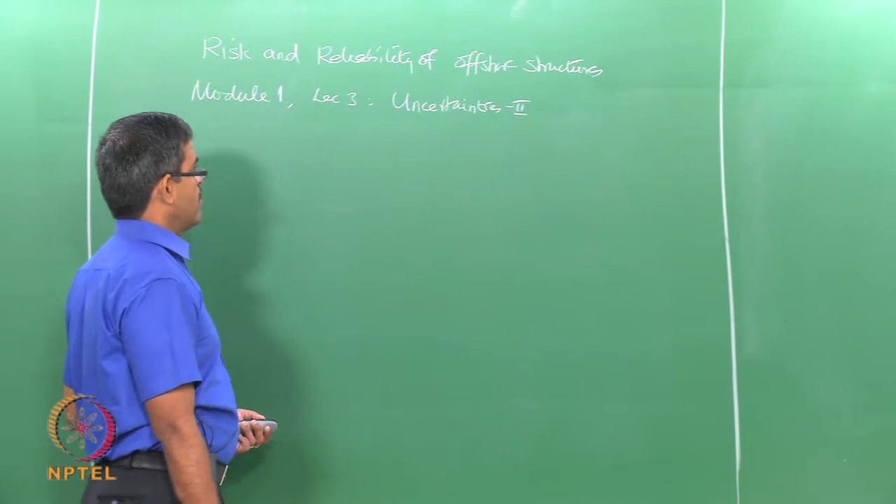Friends, we are now discussing an online course on risk and reliability of offshore structures. We are focusing on lectures related to module 1. Today, I will discuss the third lecture on module 1, titled Uncertainties Part 2.

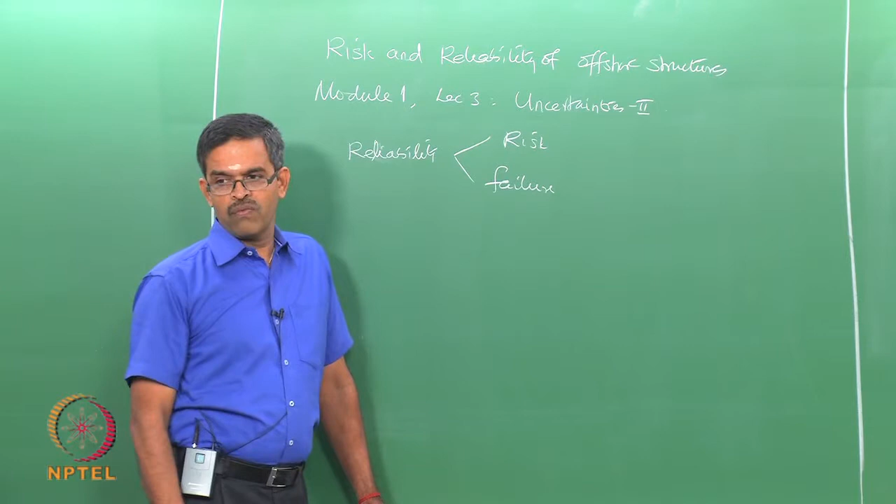In the last lecture, we briefly discussed and compared reliability with risk and failure. We said failure is a negative approach of non-performance of an intended function of any system, whereas reliability is a positive dimension of the same approach, where it says the success of performing the intended function.

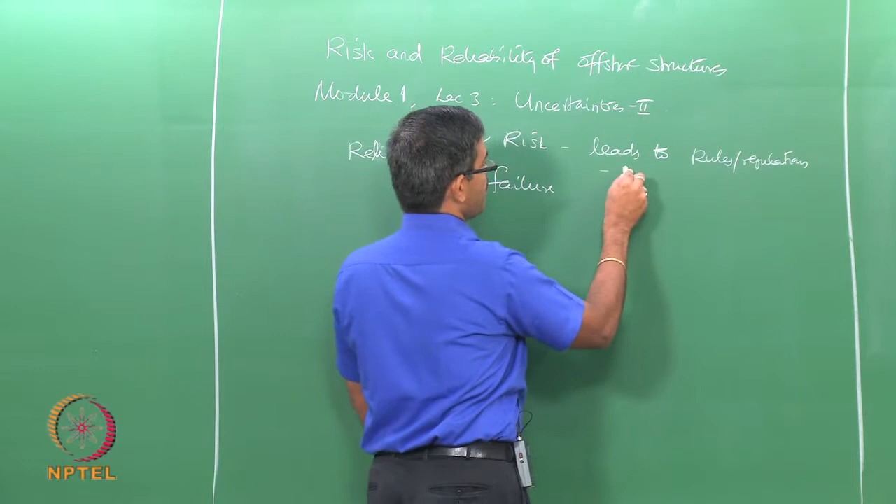Risk, compared to reliability, addresses or diagnoses the failure of an existing event and leads to confined rules and regulations, so that such incidents or accidents may not reoccur. So, they lead to preparation of or prescription of rules.

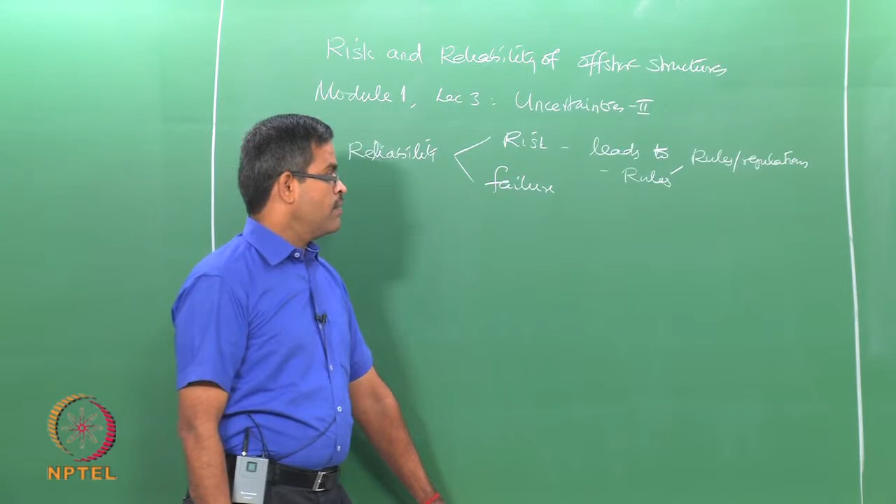It diagnoses the problem in detail, there is no doubt about it, but when you compare risk with that of reliability, reliability actually opens a detailed engineering questionnaire which shall lead to a better understanding of the failure. In fact, we can also say a better understanding of probability of failure.

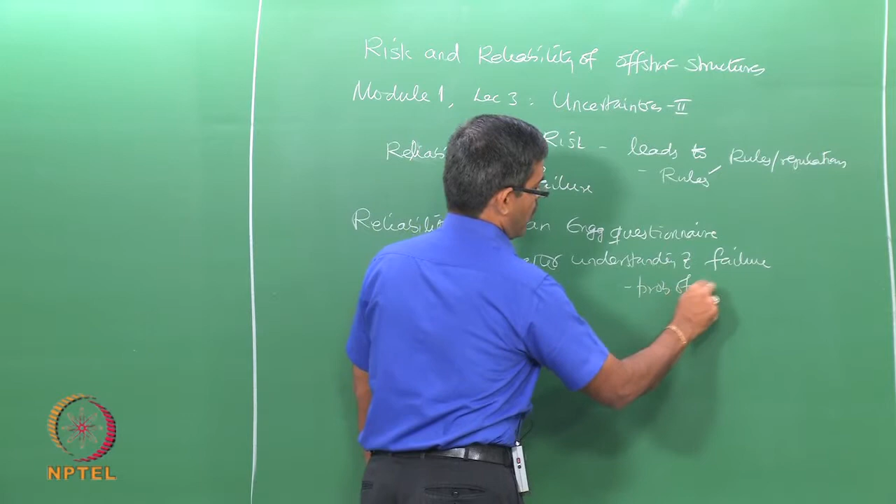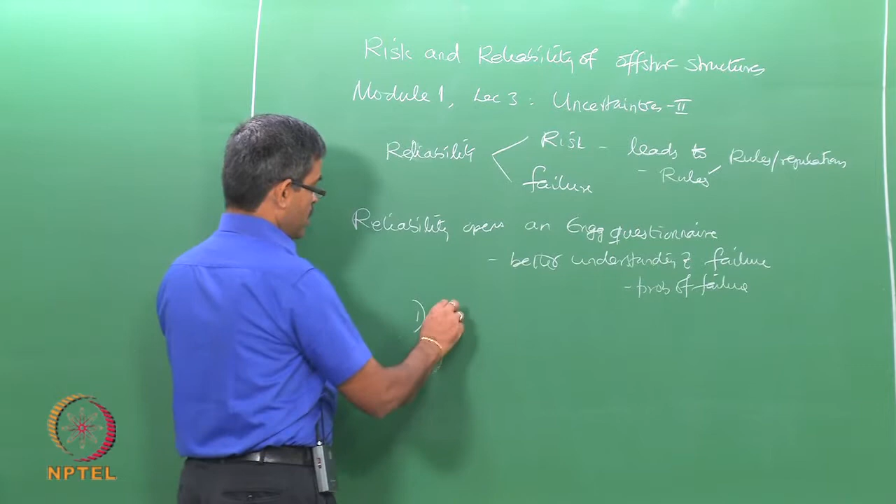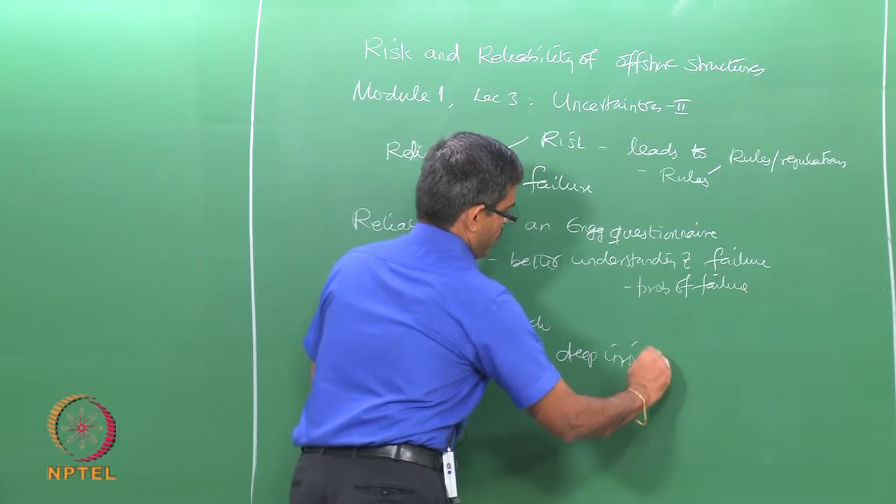So, this is a very salient advantage of reliability compared to risk. One can say reliability gives a positive approach to the problem. It is a diagnosis tool which gives a deep insight. Therefore, it is one of the basic tools.

Whereas risk is a prescriptive tool which leads to preparation of rules and regulations which can avoid such immediate accidents in the near future.

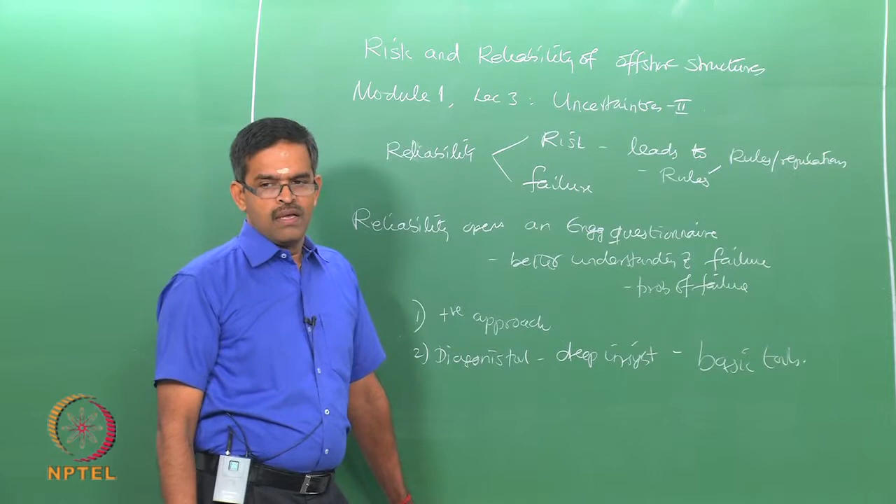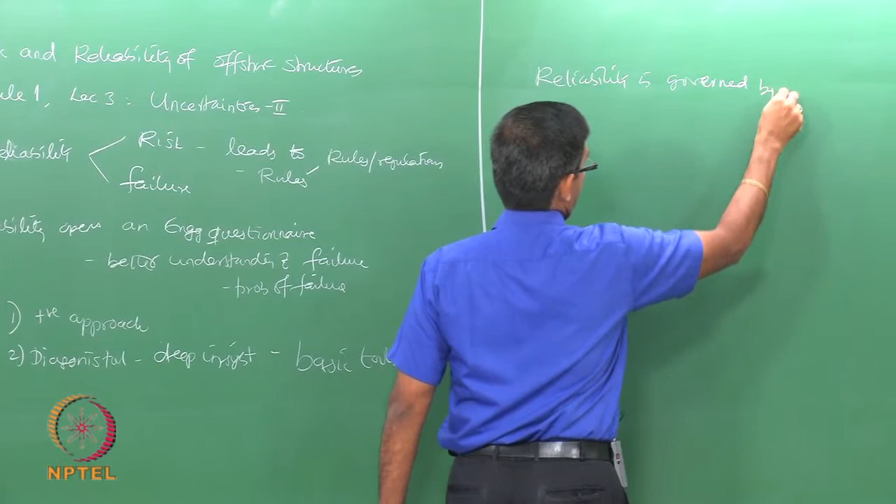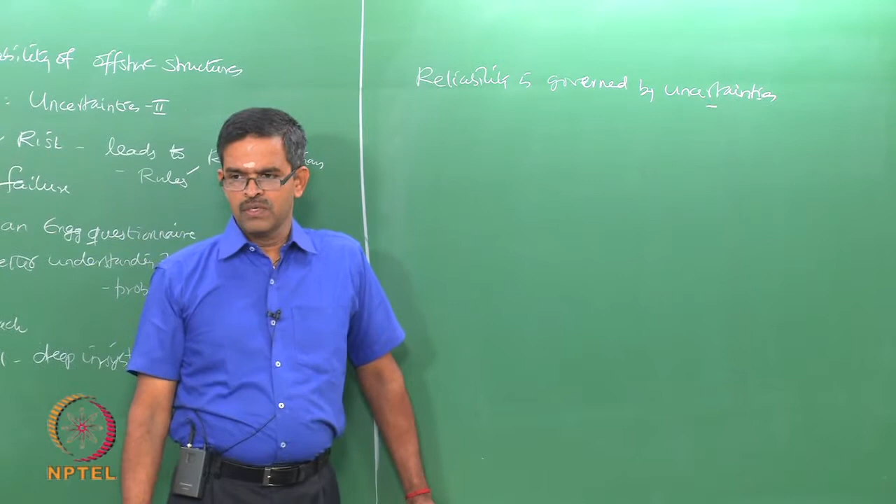We also said in the last lecture, reliability is circumscribed or governed by uncertainties. Uncertainties govern the reliability tools to judge the safe performance of offshore structures. In the last lecture, we also discussed about the types of uncertainties.

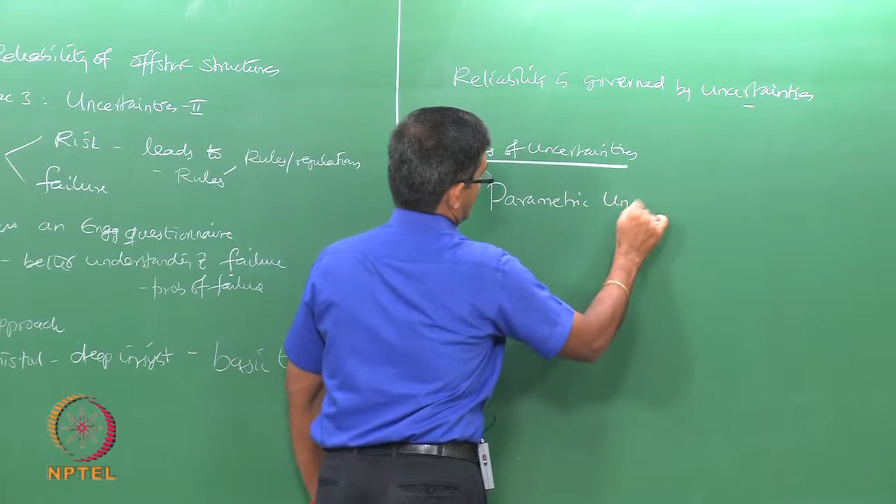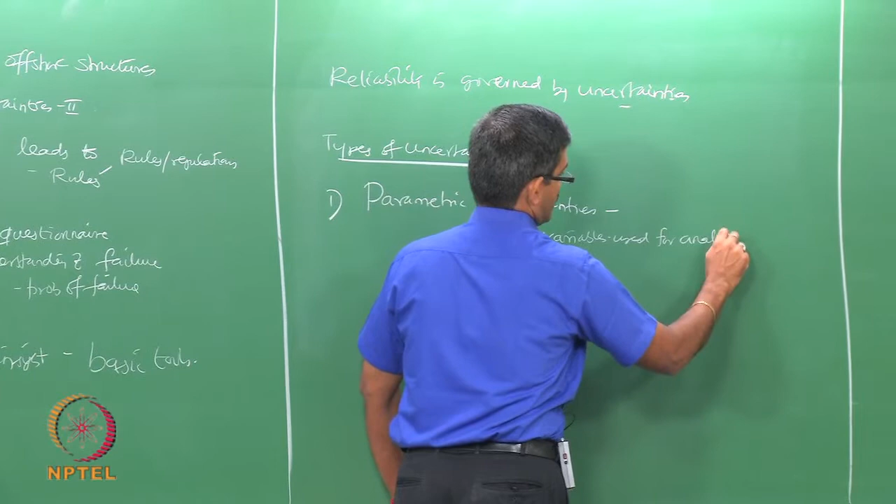If you can recall, we said the parametric uncertainties has a source which arises from the input variables used for analysis and design. So, that remains as a source of this type of uncertainty.

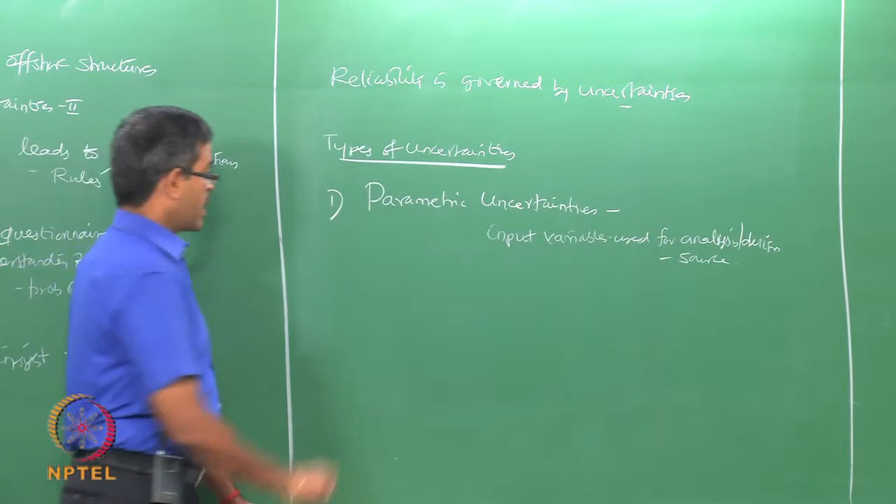The second type of uncertainty we saw in the last lecture is the structural uncertainty. This has essentially the source from the mathematical modeling. So, that remains the source of this kind of uncertainty.

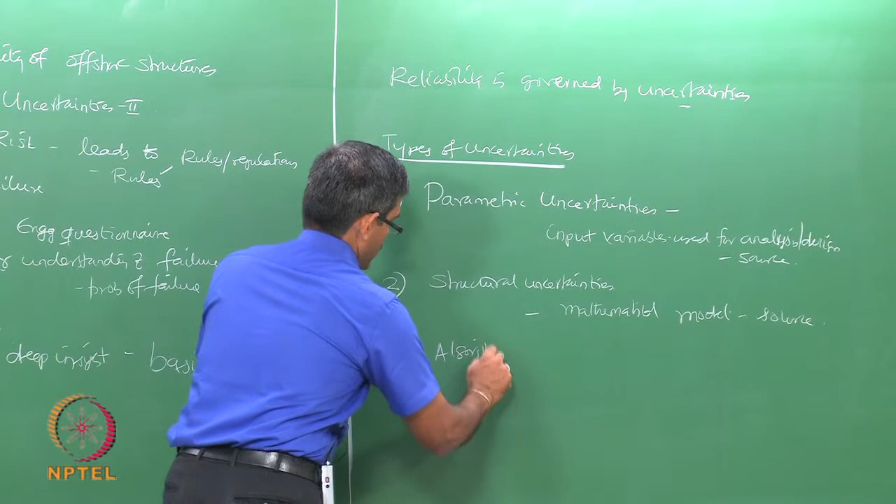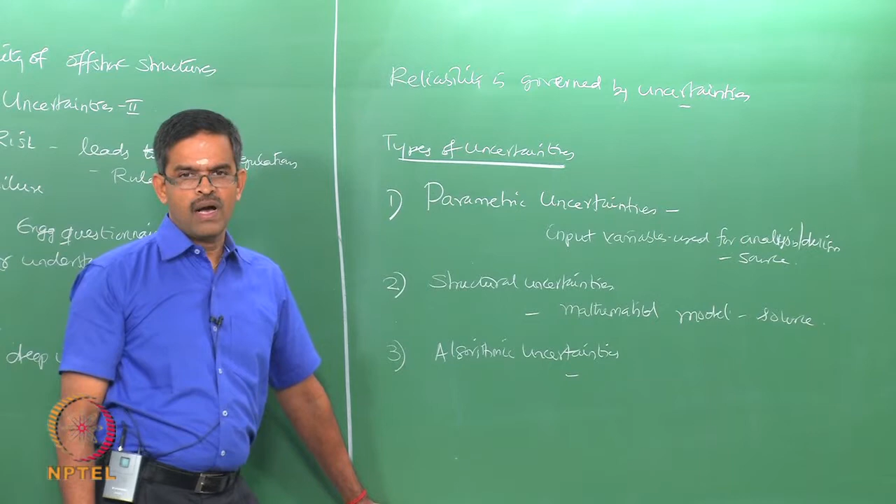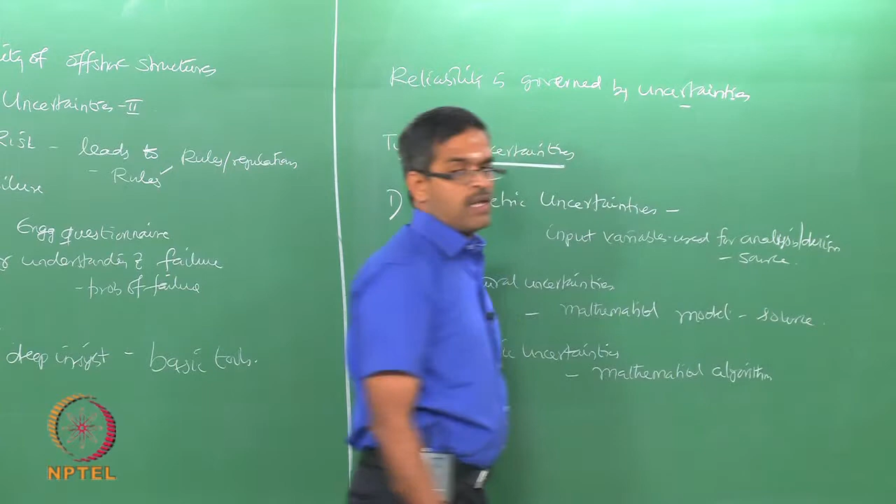The third type of uncertainty we saw in the last lecture is algorithmic uncertainties. The essential source of this kind of uncertainty arises from the mathematical algorithms that are used in the analysis and design. So, that remains the source for this type of uncertainty.

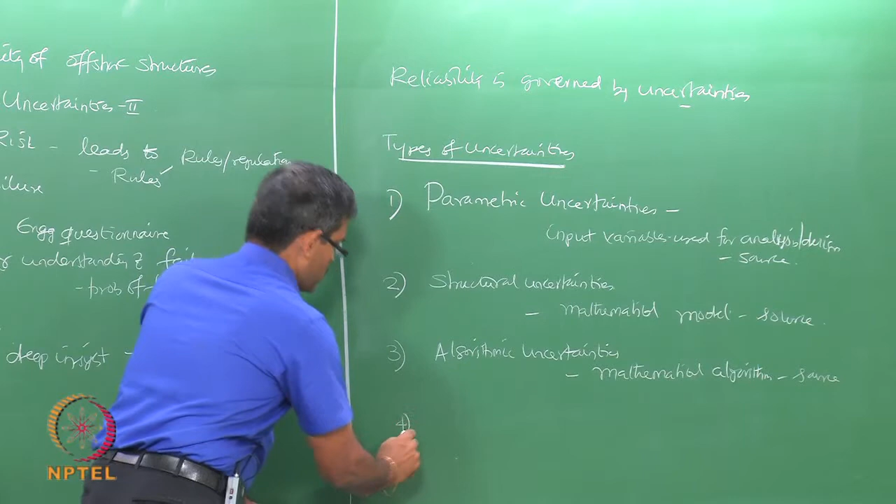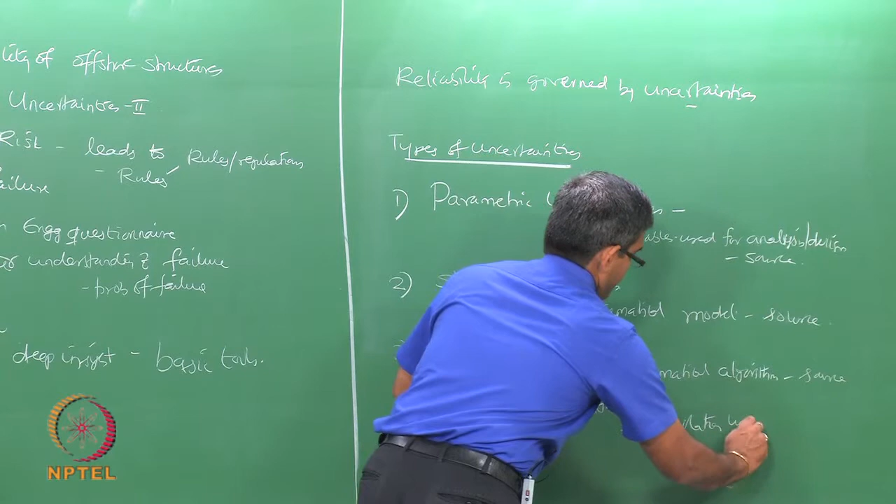The fourth and last type of uncertainty is experimental uncertainties. It is of course a subclass of what we call interpolation uncertainties, which we will discuss now in detail.

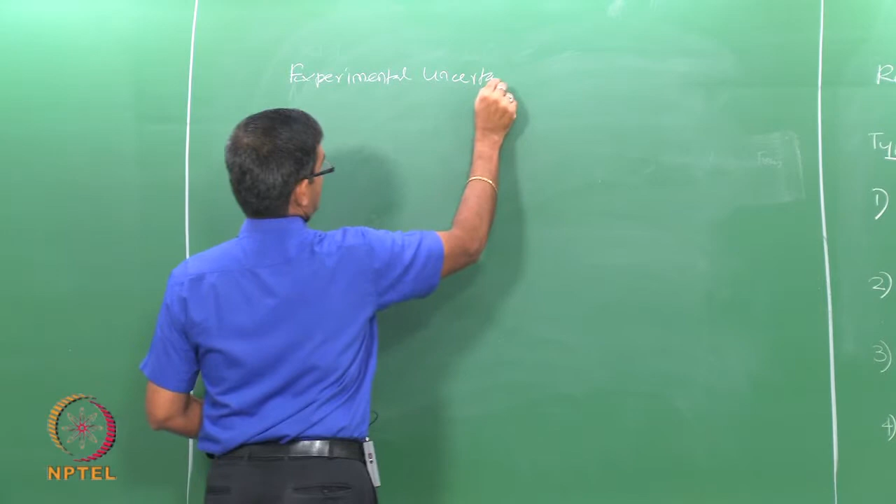If we talk about experimental uncertainties, essentially they arise from the variability of experimental measurements.

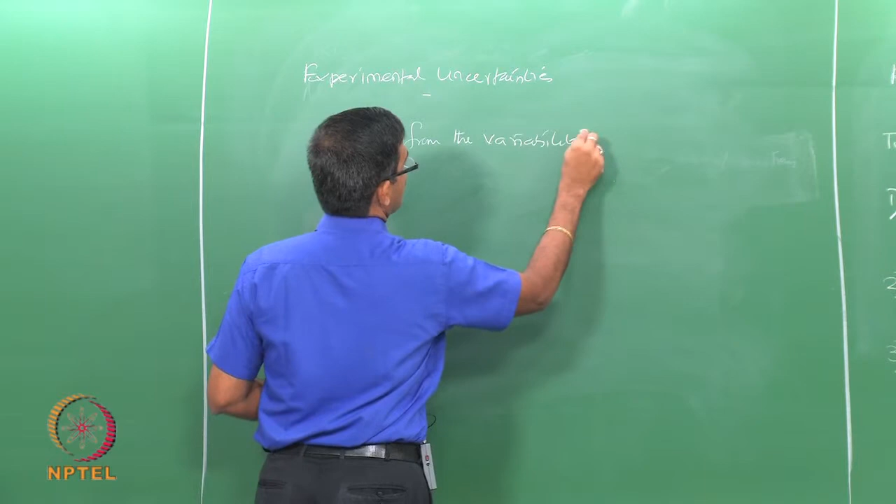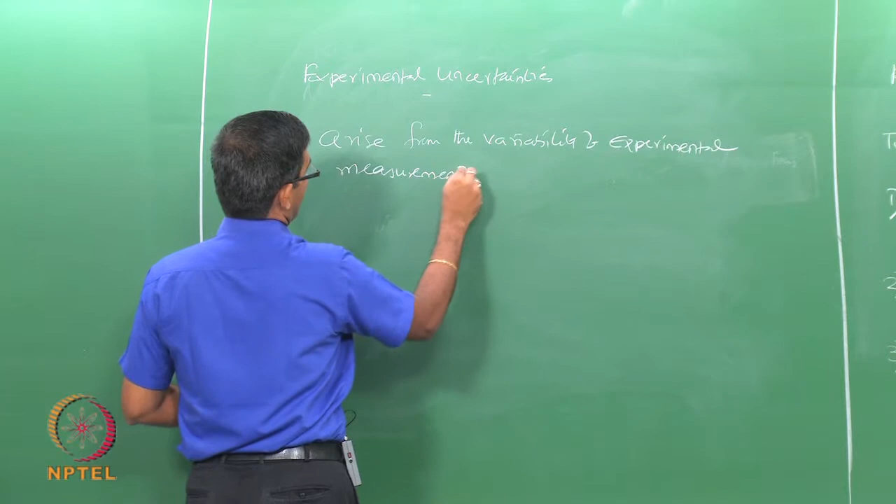We all know offshore structures need to be analyzed for different innovative forms. We discussed that in the earlier lectures. Offshore structures are unique in the design pattern. They are form-dominated, evolved designs. Therefore, any new innovative structural form always demands an experimental investigation. Therefore, experimental studies are inevitable and become a very important part of the analysis of offshore structures.

They are generally circumscribed by serious limitations that arise from the electronic sensors used for measurements during experimental investigations. So, experimental uncertainties are inevitable. You cannot avoid them, you can only control them. They will however be present inherently in any experimental investigation, but the good news is they can be minimized.

Now, how to minimize this? Repeat the experiments with the same set of sensors and input parameters.

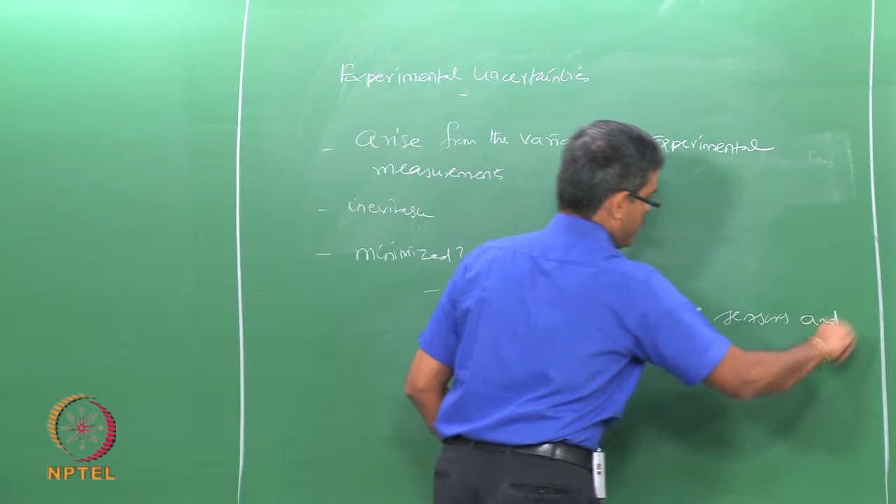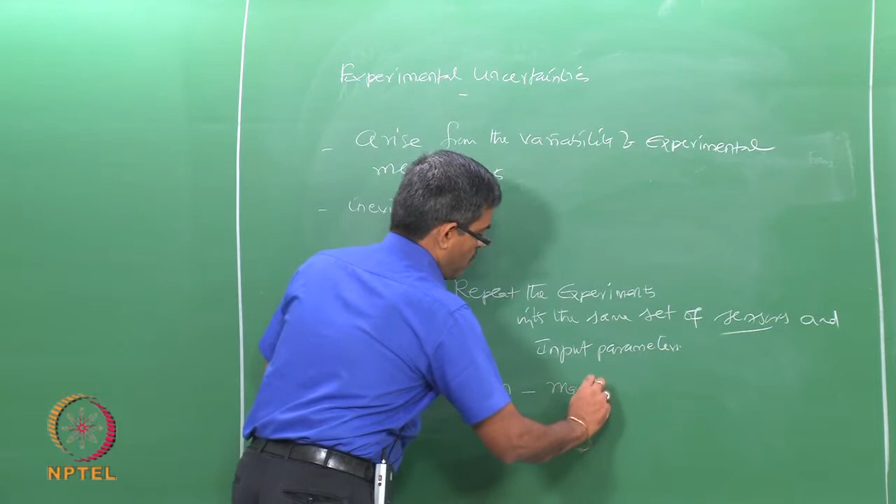The moment you have varieties of results evolving from the repetition of experiments from the same type or set of sensors, you try to take a mean of the results, and this mean can be used in the mathematical models. If you adopt this procedure, then uncertainties which arise from experimental investigations can be minimized.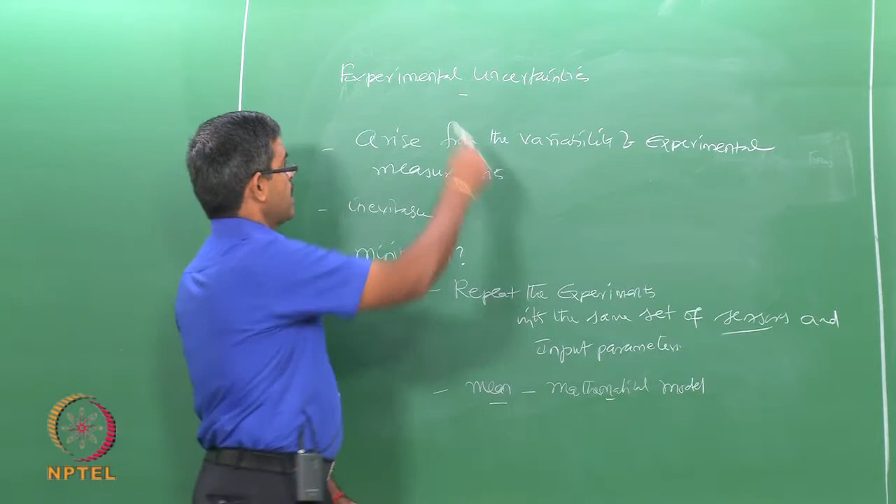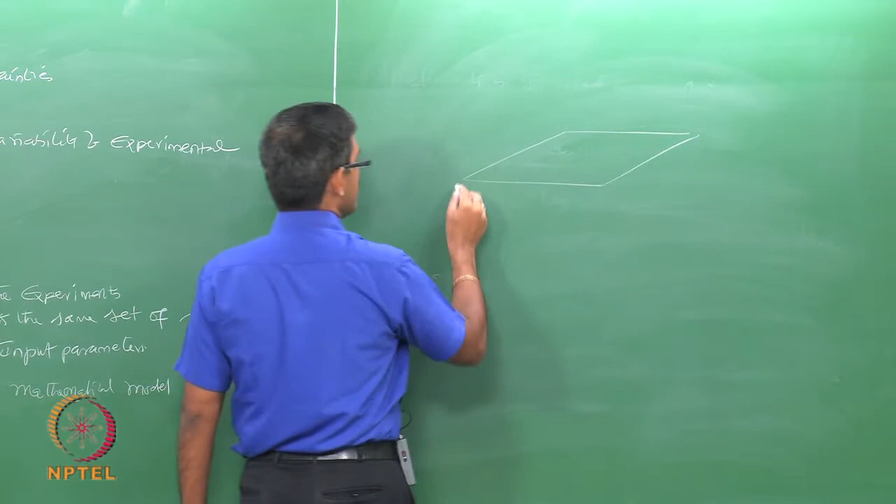Interestingly, in a given system, you try to measure, let us say, acceleration of a deck of a given platform. Let us say I have a platform model with some thickness and some lateral dimensions. The platform deck is obviously supported by the column members.

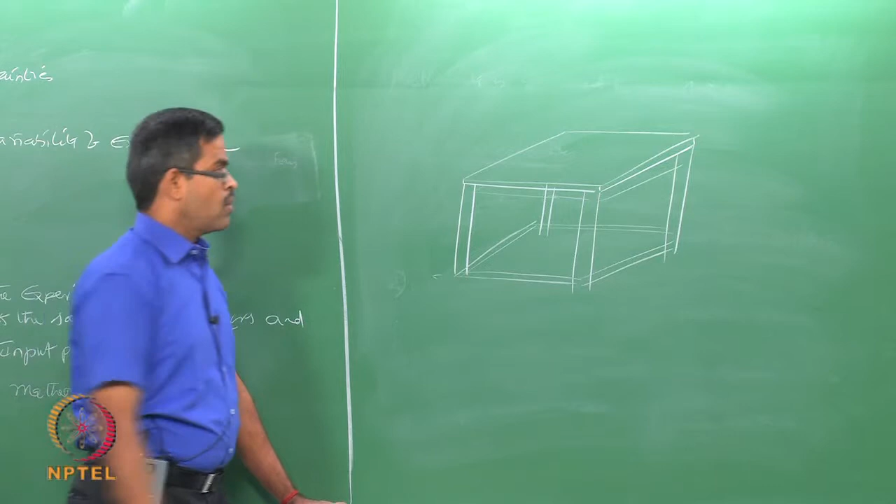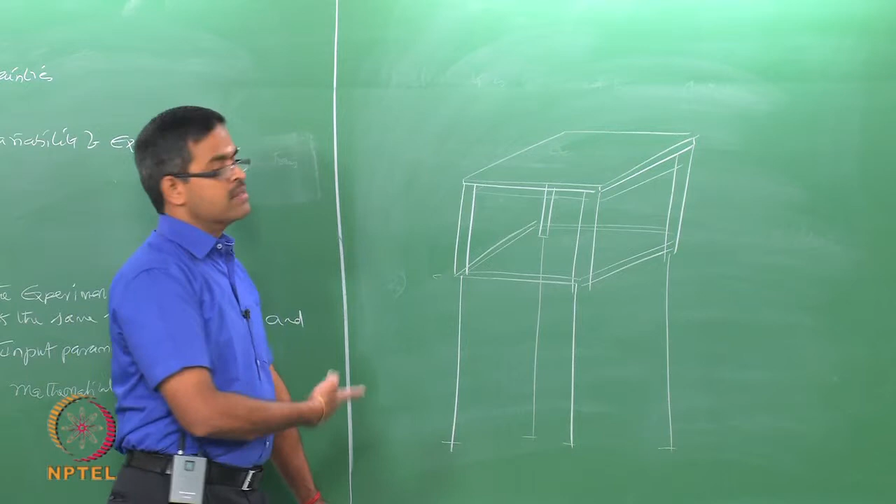And of course, there can also be a pontoon member at the bottom which integrally connects the column members at the deck level as well as at the bottom level. The whole system can now remain afloat by anchoring these legs to the seabed. So, this can be a typical model or a scaled model of a compliant system like a tension leg platform. I can always measure the deck acceleration at the mass center.

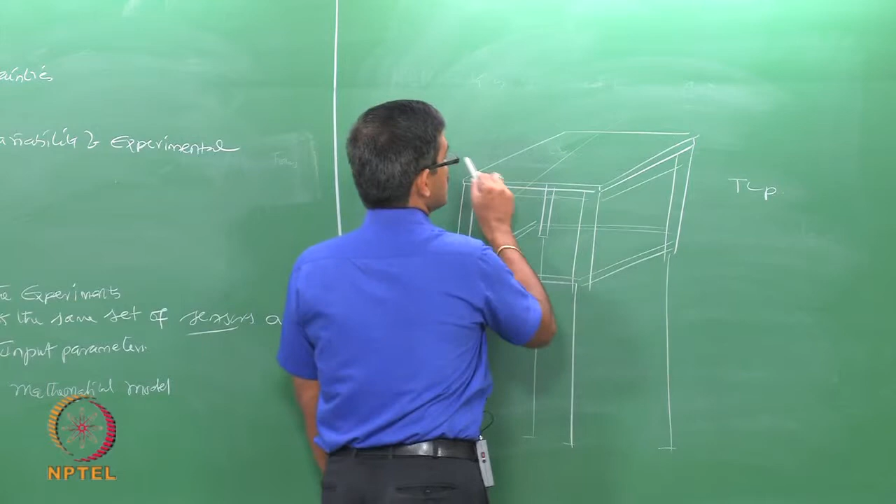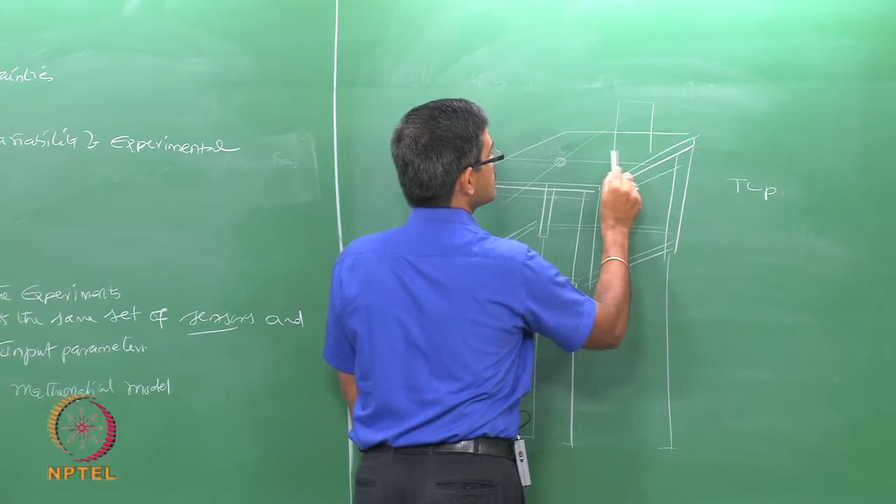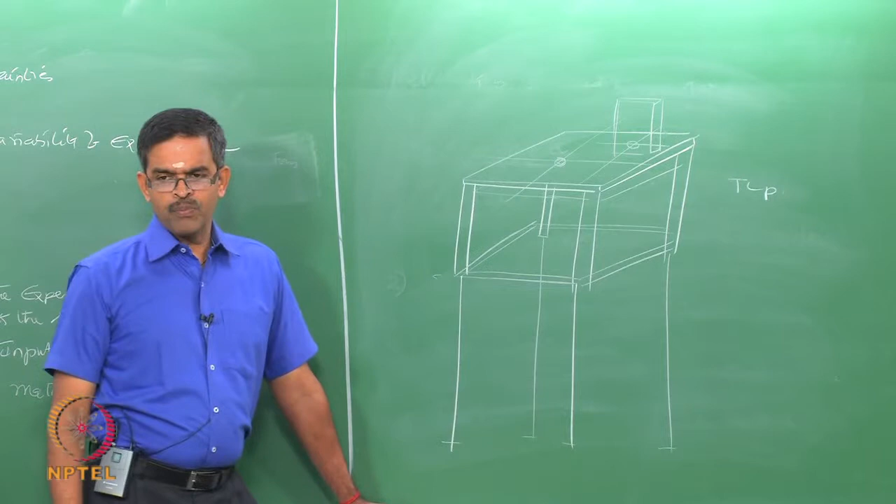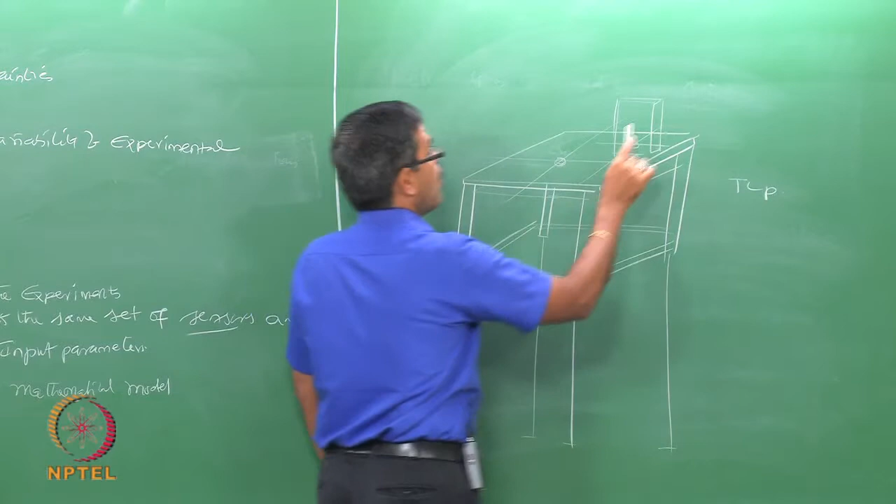If we really wanted to find out the acceleration because of an additional mass kept on the deck at its CG, then I may have to put one more additional sensor to identify the influence of the presence of this mass on the whole dynamic response behavior of the platform under wave loads or wind loads.

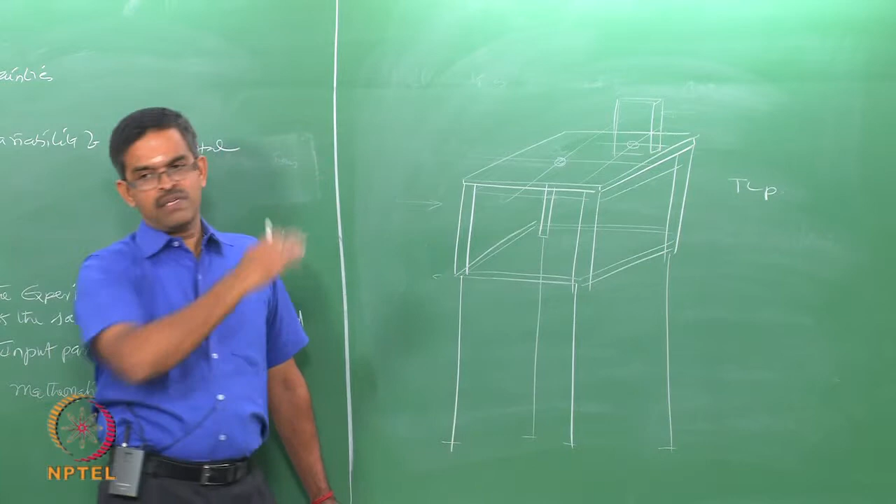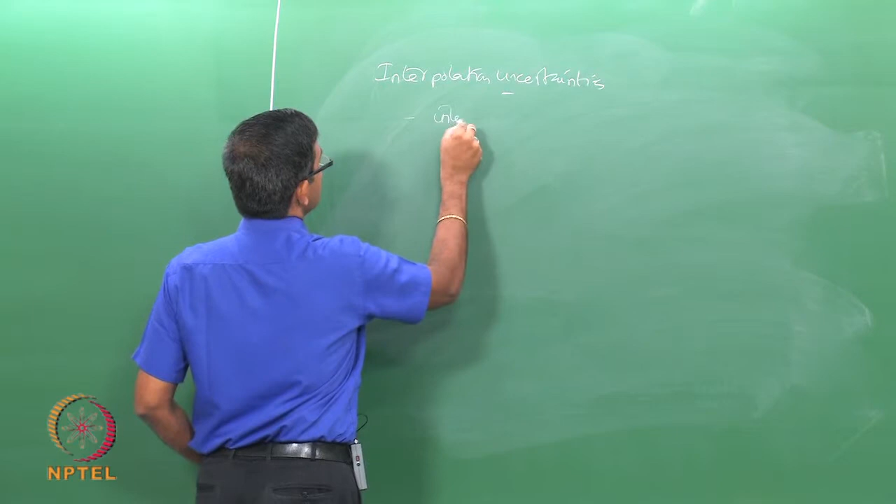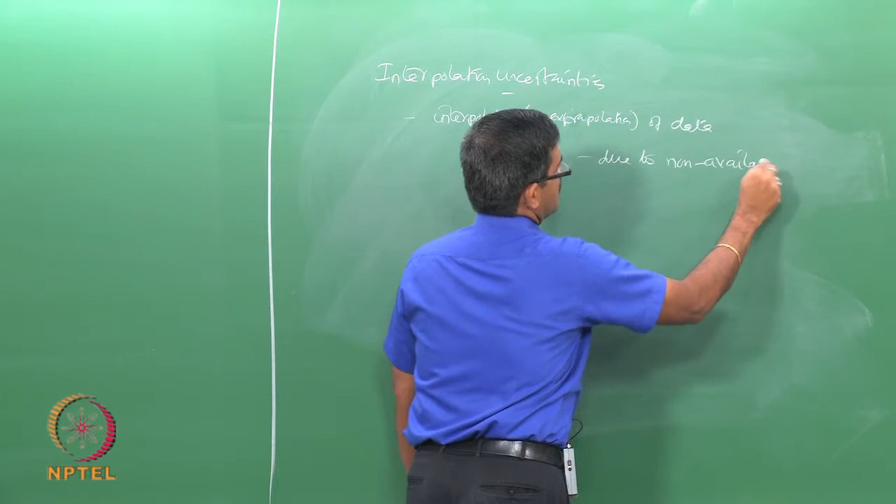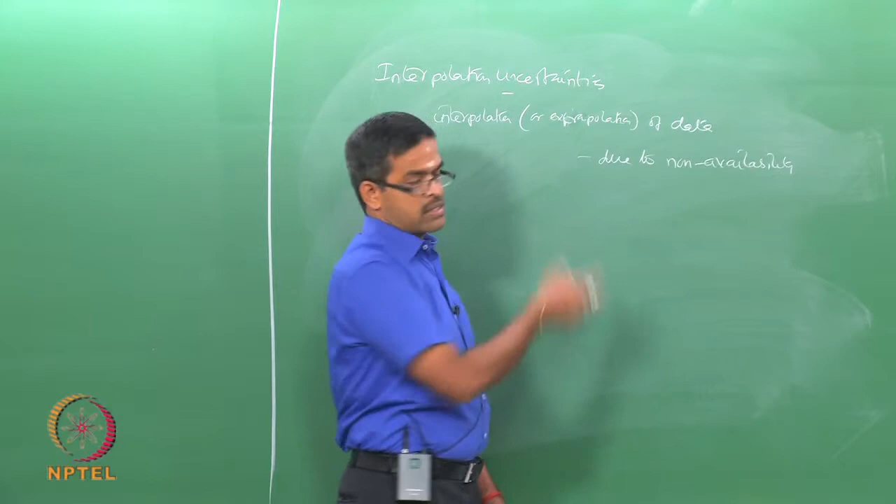Now the question comes, what is an interpolation uncertainty? Any data that is interpolated or extrapolated due to non-availability of the data in that range will also lead to uncertainty. So this is related to interpolation or extrapolation of data due to non-availability of that data in the required range of your interest. The lack of available data collected from computer model simulations or experimental measurements can lead to this kind of uncertainty.

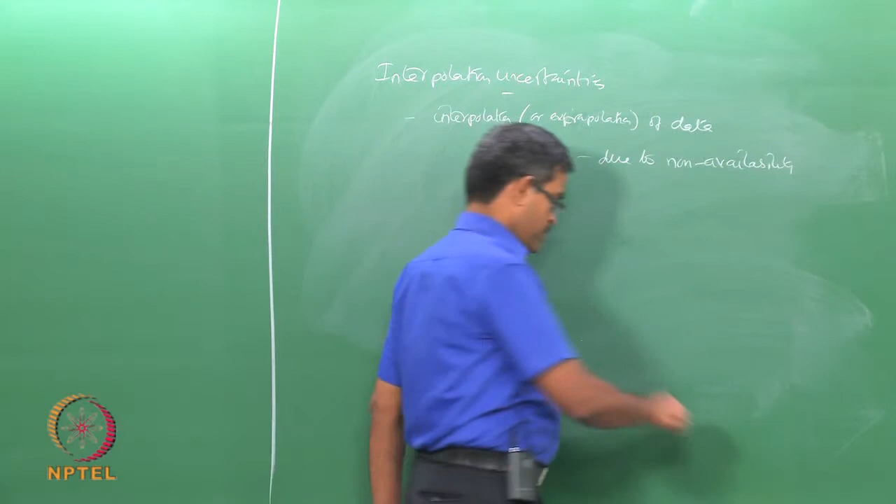When these uncertainties are applied to certain classes of analysis, the problem becomes more serious. I will give you an example. Let us take an example of how lack of knowledge about uncertainties can lead to very serious results in interpolation of the response behavior.

Let us talk about dynamic response behavior of an offshore platform. The moment I say dynamic response behavior, I have got three essential characteristics present in a dynamic system, if you remember or recollect the equations of motion.

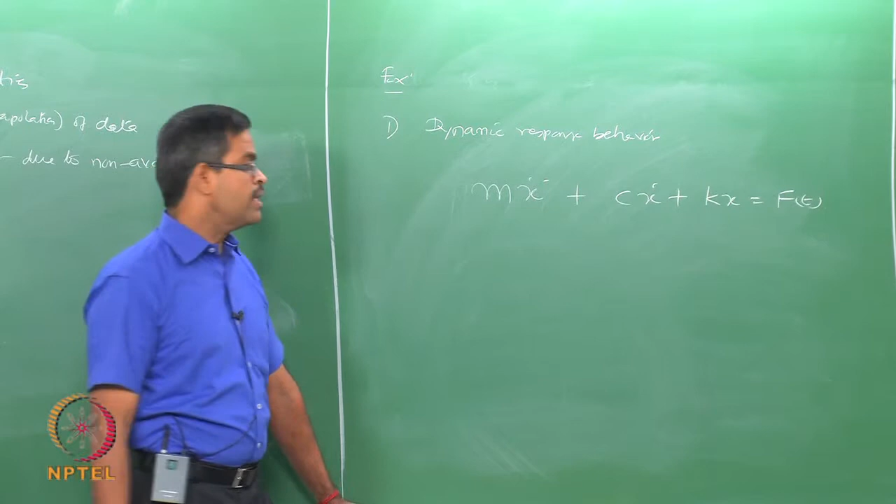This is the classical equation of motion for a single degree or multi degree of freedom system, provided the mass matrix, the stiffness matrix and the damping matrix remain either a single element or an array of elements if it is a multi degree of freedom system. So this has got varieties of input parameters which are important characteristics of the dynamic system.

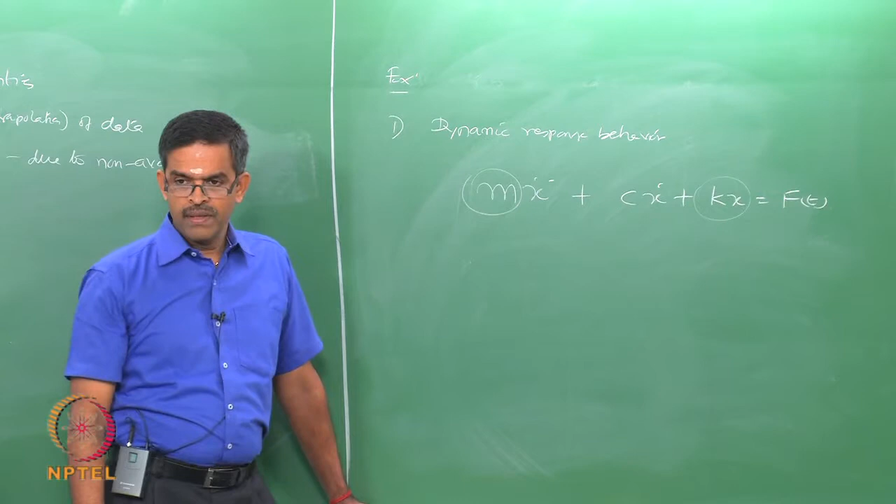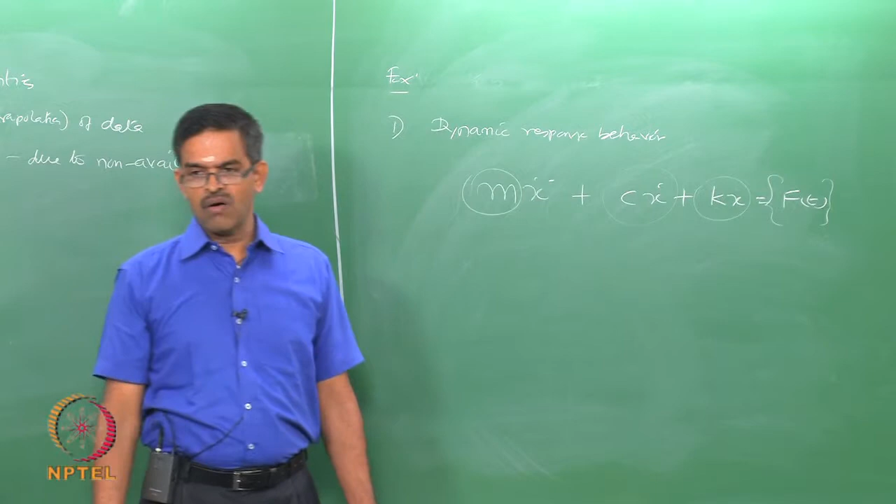It requires an inertia force which is mass governed, it requires a restoration force which is stiffness governed, it requires a damping force which is damping constant governed, and of course the system requires an external force which excites the system. So, in the absence of these four characteristics, the system cannot be assimilated for a true dynamic response behavior.

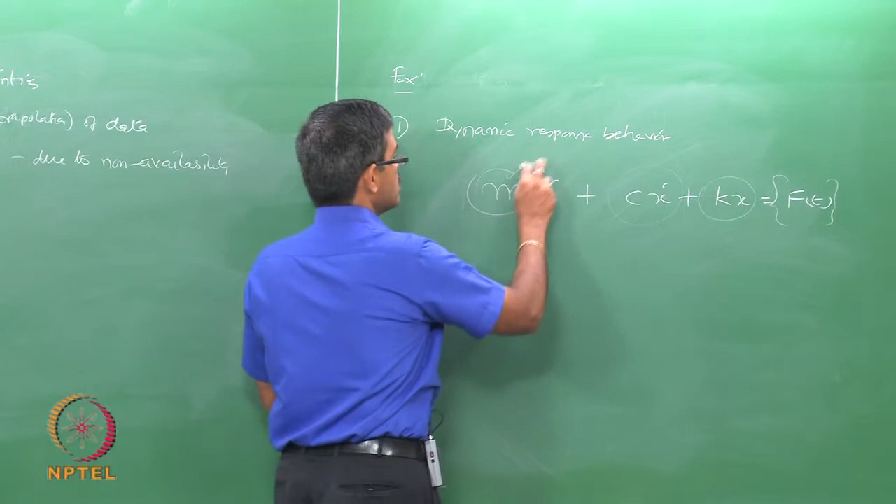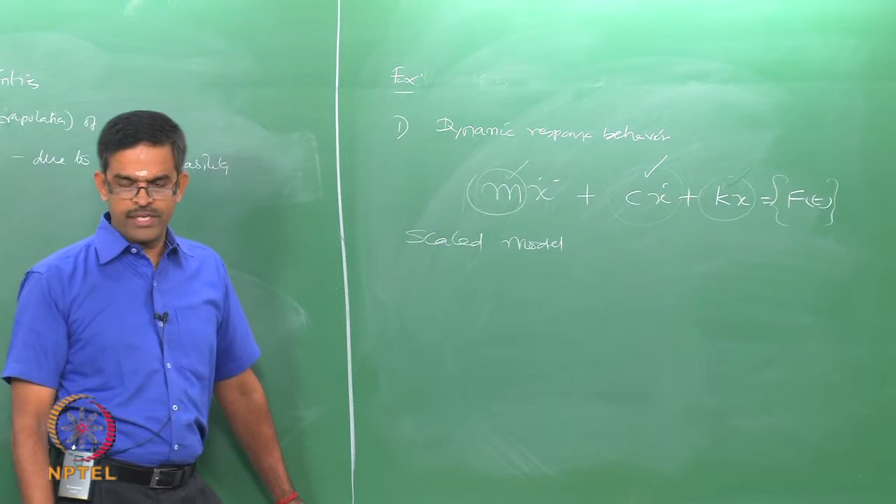Amongst this, let us take two classical examples: one the mass, other the restoration or damping. When you talk about scaled investigations or experimental investigations on scaled models, it is very difficult to simulate all topside details of an offshore platform to the respective scale for which you are fabricating the model.

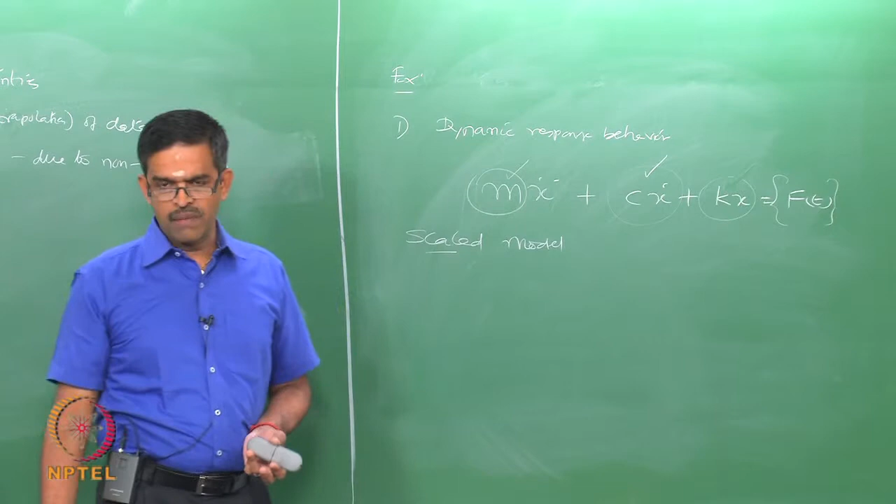Now unfortunately, if the physical model does not represent the appropriate mass - I am not saying the exact mass, I am saying the appropriate mass - of the prototype, then the dynamic response estimates you get, either analytical, numerical or experimental, can have very high uncertainties.

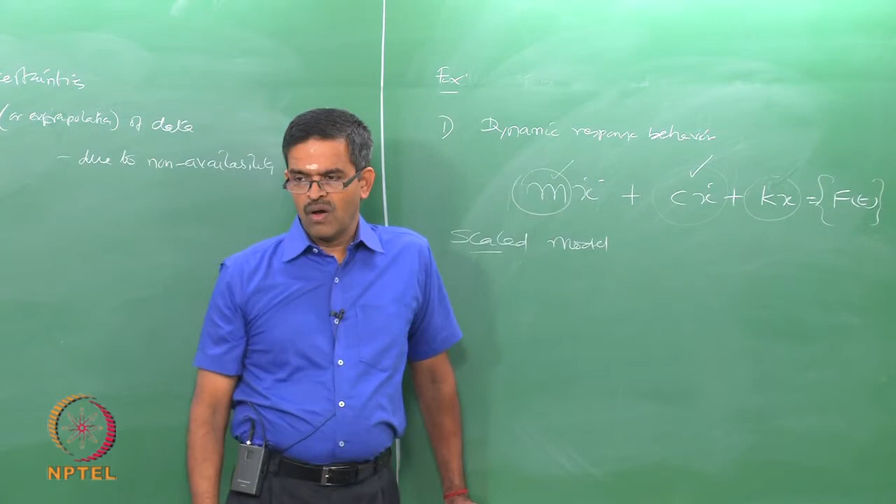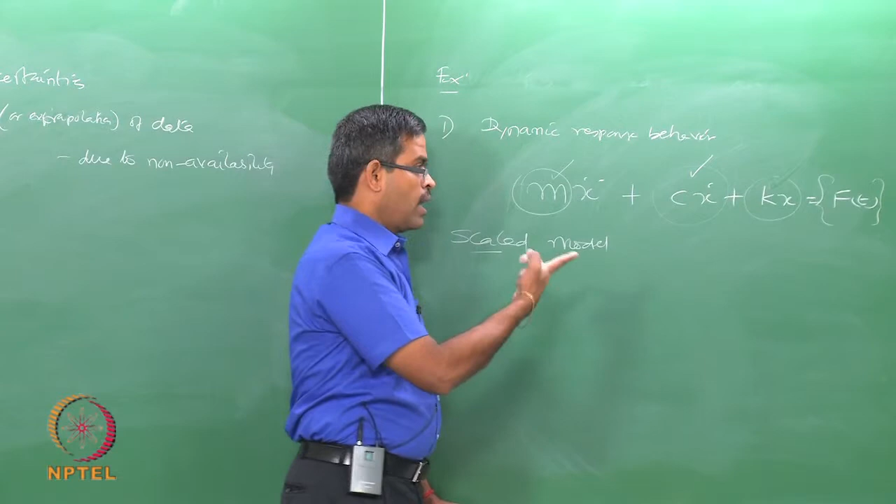I am not saying error. Now what is the difference between uncertainty and error? We will talk about that in future lectures. I am saying if the physical model does not represent the appropriate mass of the prototype, then the dynamic response behavior evaluated by you, numeric, analytical or experimental, can have very high uncertainties.

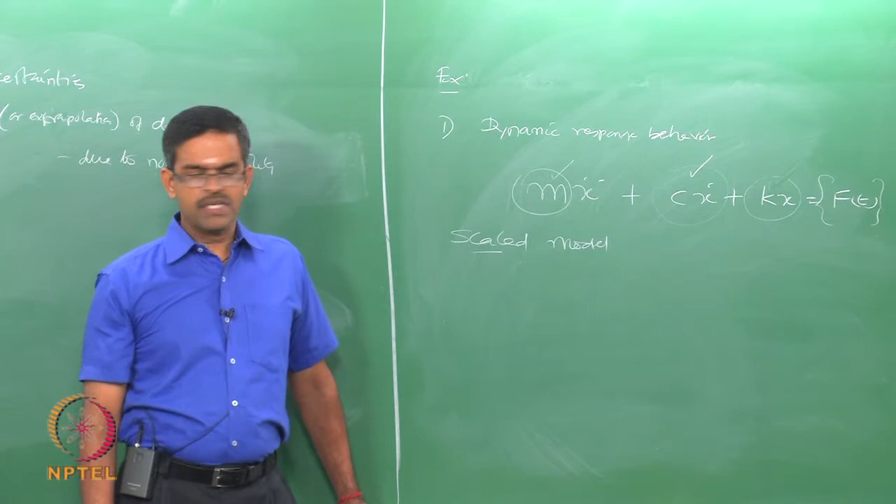Such problems are very common in experimental investigations of scaled models. You will not be able to represent the true physical model in terms of its mass, and we all know if you want to look at the dynamic response behavior, mass or the inertia force plays a very important and governing role in such dynamic response analysis.

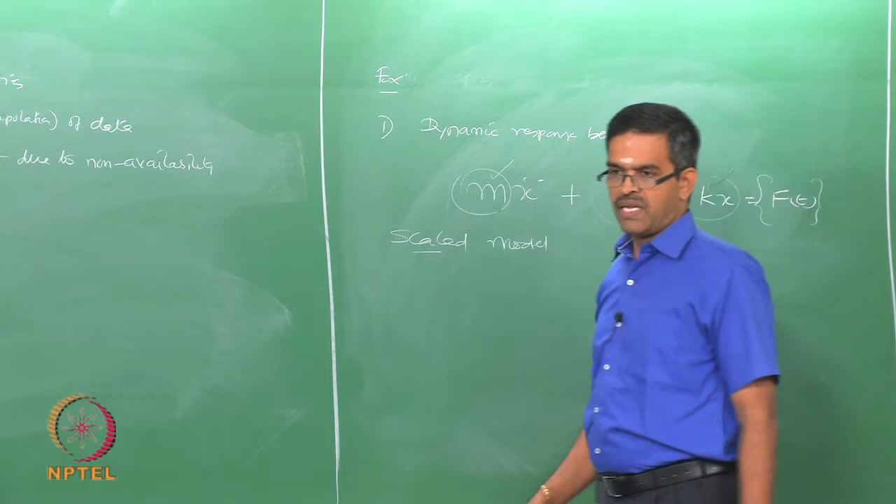So friends, we discussed some important tools which will open up the discussion for reliability and risk analysis or estimates of offshore structures. Let us quickly summarize them to understand the vital points we will round about, and then we will take you forward in this particular course.

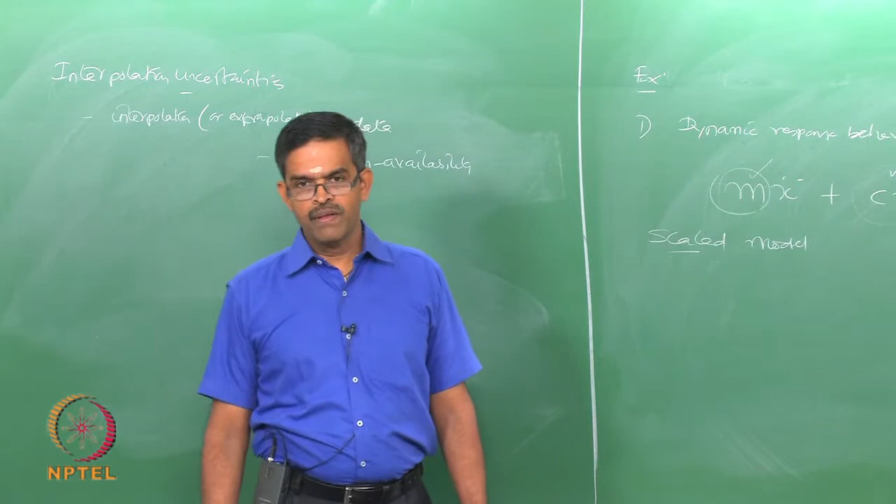We already said offshore structures are a special class of structures. They are unique in their design and functionality. They should remain flexible to alleviate the encountered environmental loads acting on them. They are also required to remain robust and safe during all levels of operations. Therefore, the whole factor of ascertaining offshore structure establishment is functional safety.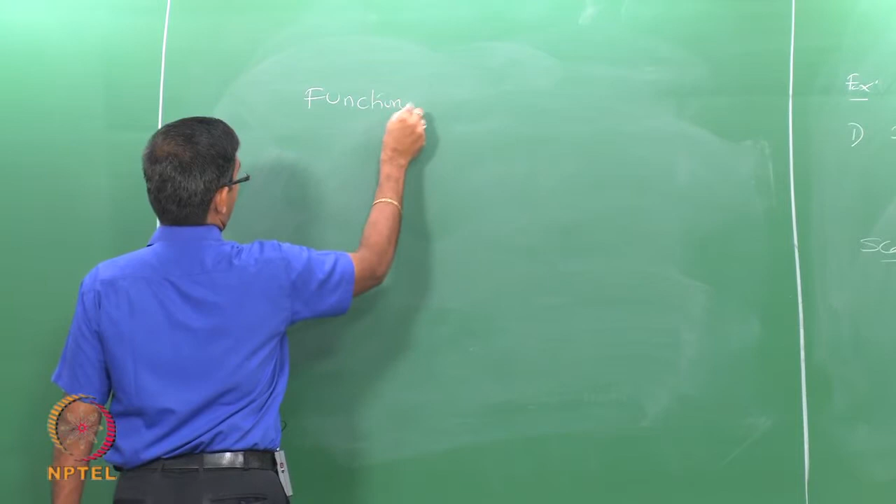So, functional safety is the key factor.

So there are two keywords here. One is safety, the other is safety while it remains functional. So we are talking about functional safety.

We also know offshore structures are classic in nature because of the encountered environmental loads, such as wind load, wave loads, currents, impact loads from vessels and barges, and machinery loads from drilling units and derricks on the top side, which make the response behavior of the platforms very complex. Their estimates will also have high levels of uncertainties.

Environmental loads are not completely known; only some features of them are known to an analyst. Randomness in environmental loads increases these uncertainties in many facets of offshore engineering domain, for example during planning, during analysis and design, and also during construction stages.

Now the question comes in an offshore structural engineer's mind: how to solve this kind of complexity which arises from different domains of interest or different facets in offshore engineering domain.

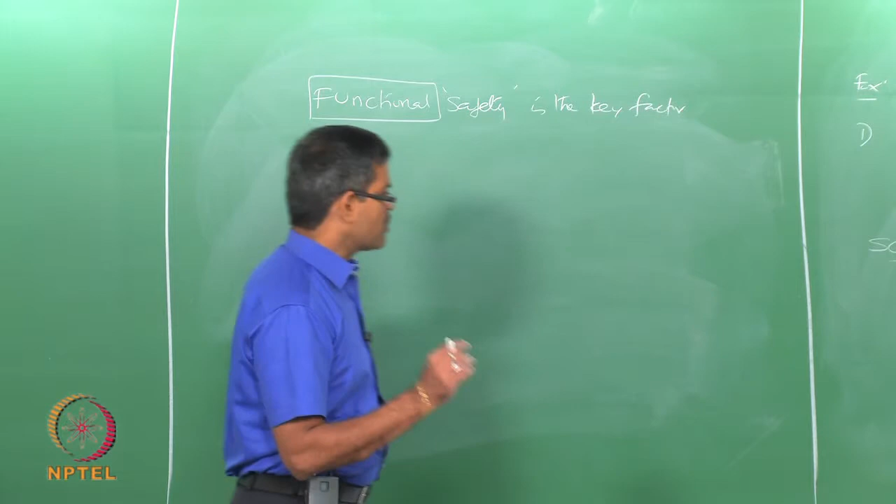Reliability tools can handle this wide range of uncertainties very effectively. Reliability methods have many advantages which we discussed in the last lectures. Of course, they also have a few limitations.

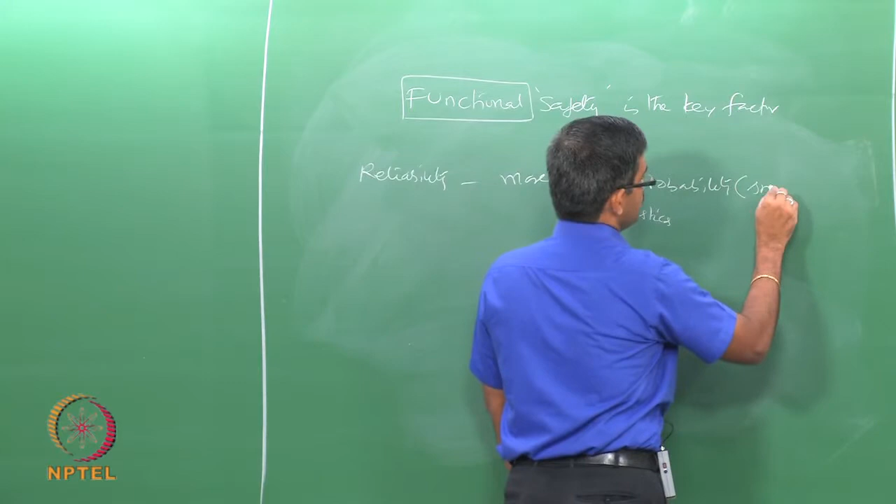Most important point we want to emphasize is that the reliability method has two components: it is more part of probability and statistics. If you want to compare the contribution of probability and statistics on reliability methods, one can say probability is used to a smaller extent, whereas statistics is used to a larger extent.

If a mathematician understands and simulates a problem, which also involves tools of probability and statistics, an interesting dimension he would give to such problems is that he can start doubting the behavior of the model, with the background information he has from the tools of probability and statistics.

So doubting alone will not help. As an engineer, we need to address these uncertainties in detail before we take it forward for commissioning a platform on a trial basis.

Therefore, reliability tools explicitly underscore acceptance of risk, which is actually an implicit factor. It is an inherent, inbuilt factor.

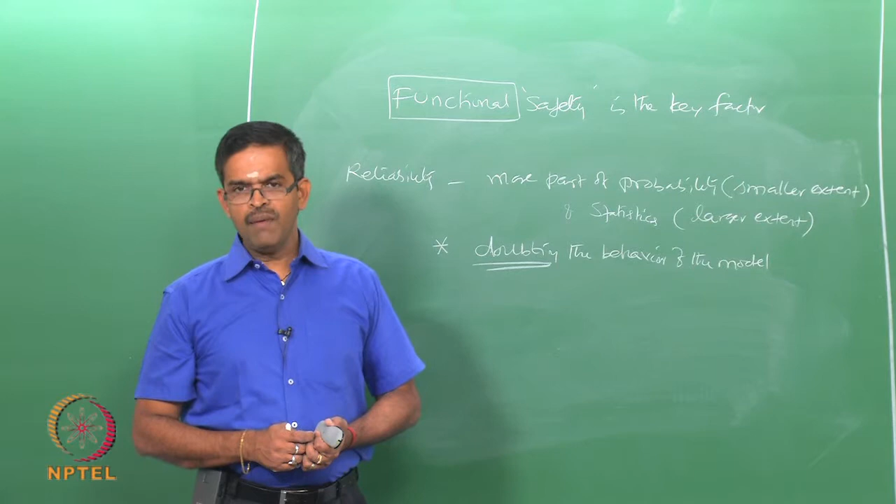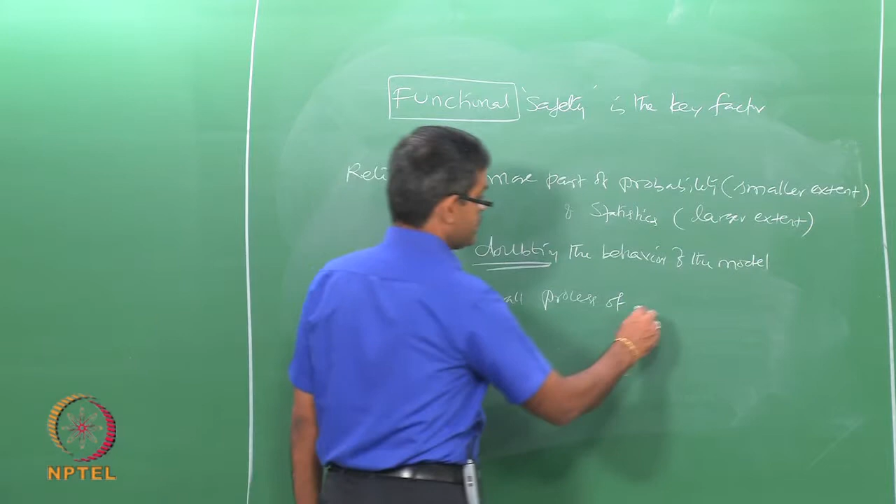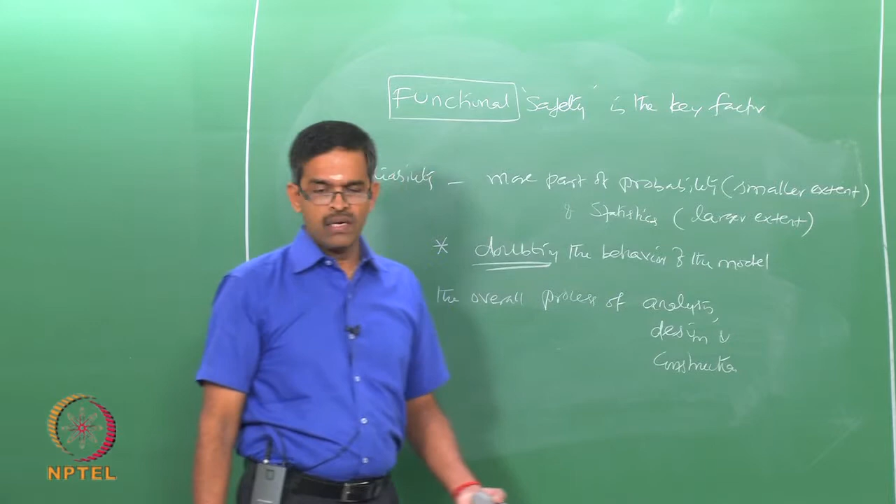In general, reliability methods project the overall process of analysis, design and construction. I am not talking about repair, rehabilitation, maintenance, decommissioning — all can be included in the same list for offshore structures.

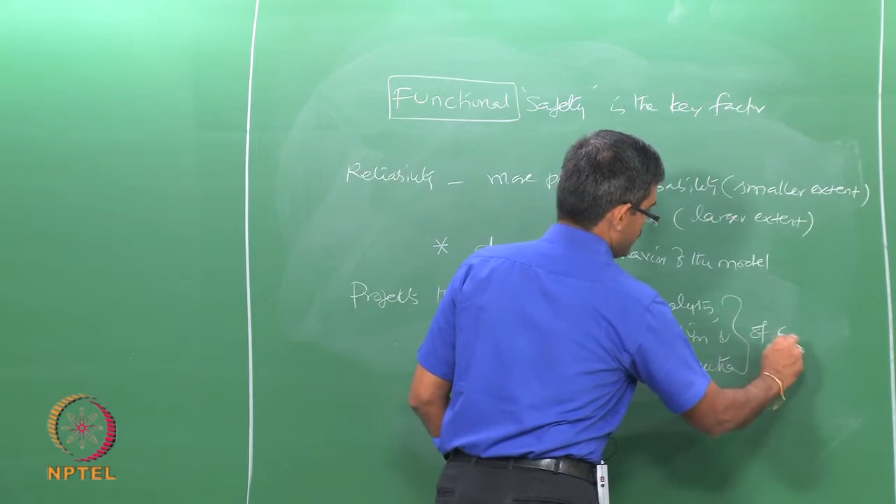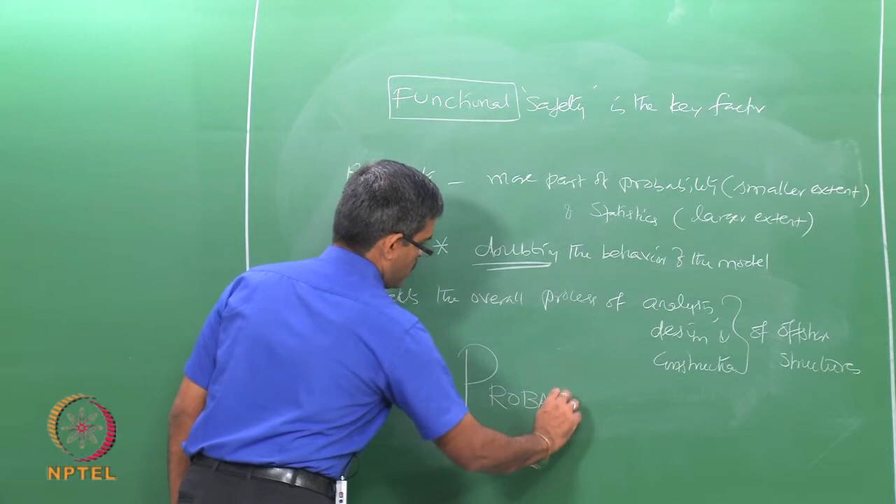Only as a probable solution, not an exact one.

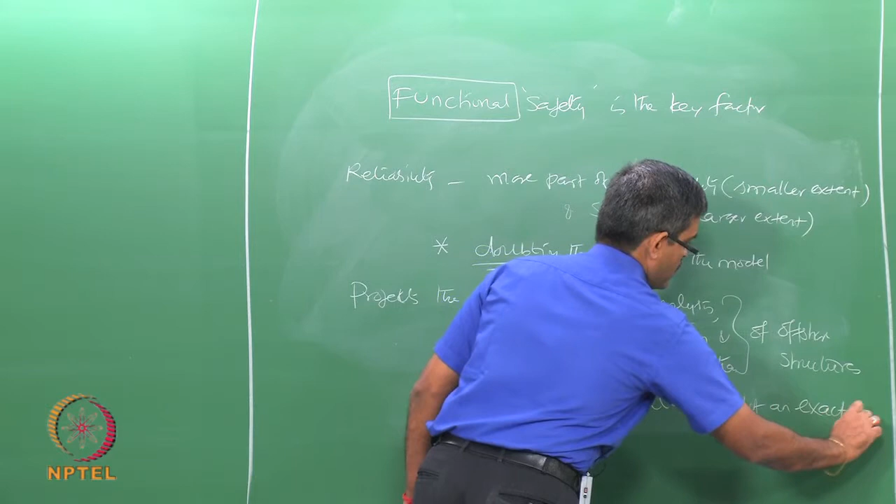Why does this happen? It is because reliability is circumscribed with uncertainties. Uncertainties need to be expressed in probabilistic terms for their better representation.

Failure of a structure, as we all know now, is true only under certain specific conditions. Conversely, reliability is expressed in terms of success of a system to sustain the demand expected from the system. Reliability implies estimate of limit state probabilities of a structure under critical demand.

Safety is another term used in the same context. Safety is generally used to indicate reliability as a conventional or traditional concept. Reliability, of course, is the probability of success of a system to perform the intended function over a specific period of time under the given situations.

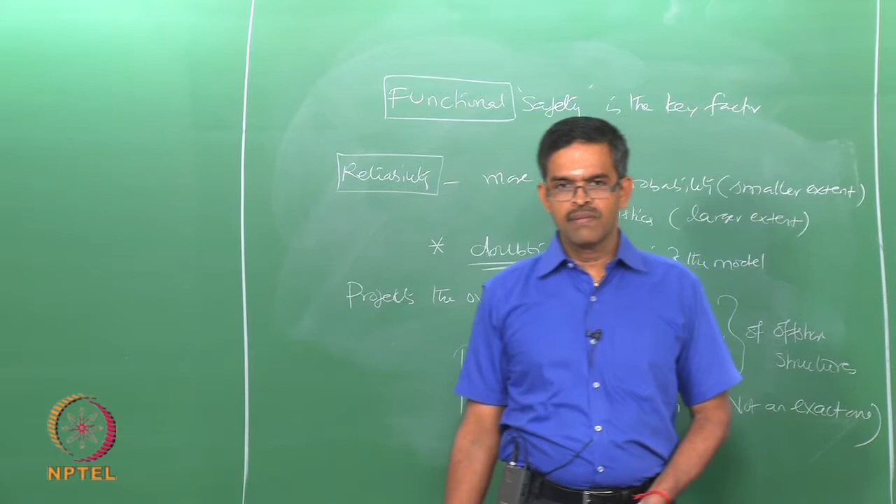Reliability is also looked at in a traditional way in terms of risk on a given system. If I say the system is not reliable, the question asked by an engineer could be, is the system at risk? Risk, of course, is the measure of magnitude of a hazard; hazard is a scenario. Therefore, reliability in offshore structures is only to assess the functional safety.

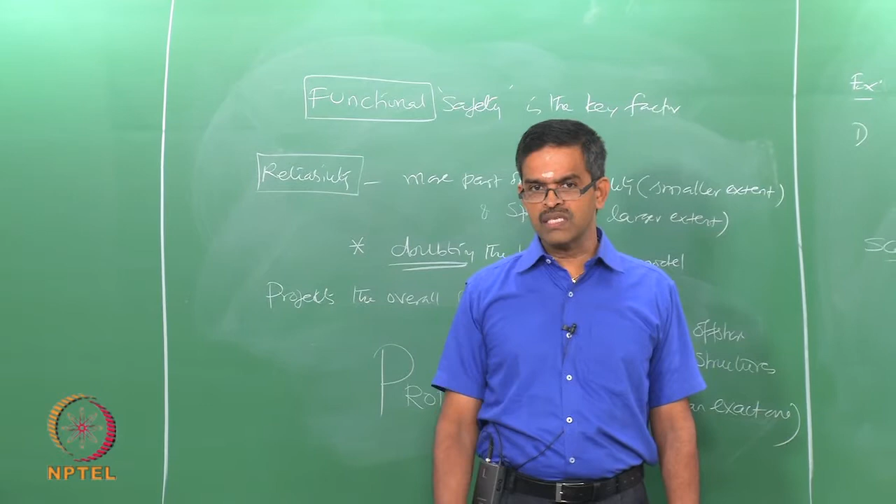So we have got three terminologies now circling around: reliability, failure, and safety or risk. We have discussed them independently, and we have also connected them to understand, in a given pool of offshore engineering domain, where they stand and how they are interconnected.

Reliability is of course focused on those problems that are not realized by the society directly, but those problems which challenge the safety indirectly. It is therefore interesting to know that risk assessment from failure analysis does not generate discussions; it only leads to prescribing rules and recommendations. But reliability opens into an engineering questionnaire that shall lead to a better understanding of probability of failure.

When we talk about uncertainties, we already know uncertainties govern the reliability tools to judge the safe performance of a given system. There are different types of uncertainties, namely parametric uncertainties, structural uncertainties, algorithmic uncertainties, experimental uncertainties and interpolation uncertainties. We have discussed these details in the lecture.